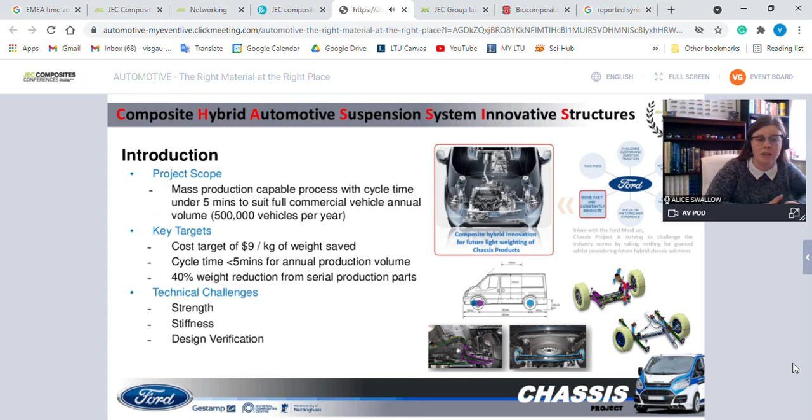There's obviously a lot of technical challenges with this. As I mentioned, they're all structural components looking at the suspension. So it's really important to look at the strength and stiffness and design verification. A lot of these parts, the strength and stiffness will actually determine the vehicle dynamics, so obviously we don't want to change our vehicle dynamics DNA that our customers are used to.

The three suspension structural components that we're looking at are the front subframe on the left, the front lower control arm in the middle, and the rear dead beam at the end, which is just the rear non-driven axle. We have the steel components on the top and our hybrid designs at the bottom, which I'll go into more detail in later slides.

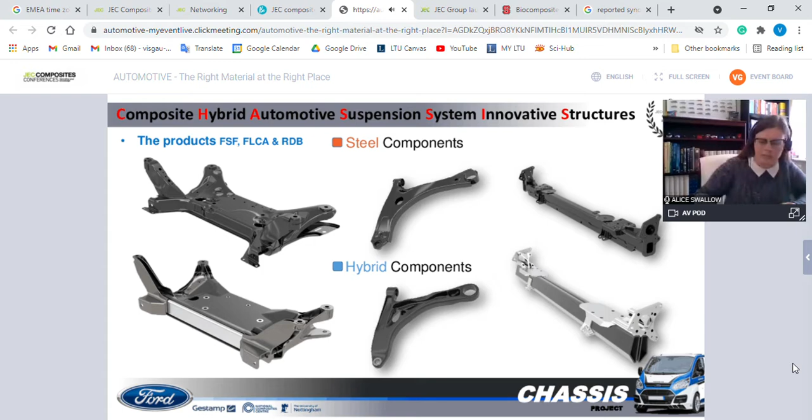Another great aspect of using the right material in the right place, using composite materials and adhesives in the design, is that we can actually reduce the part count within these components. This is a great way to ensure that it can be easily integrated and assembled. Obviously, that reduces a lot of complexity, reduces a lot of opportunity for error, and therefore improves quality. Across the three components that we looked at, we actually had a 56% reduction in parts, so that was another benefit of the project there.

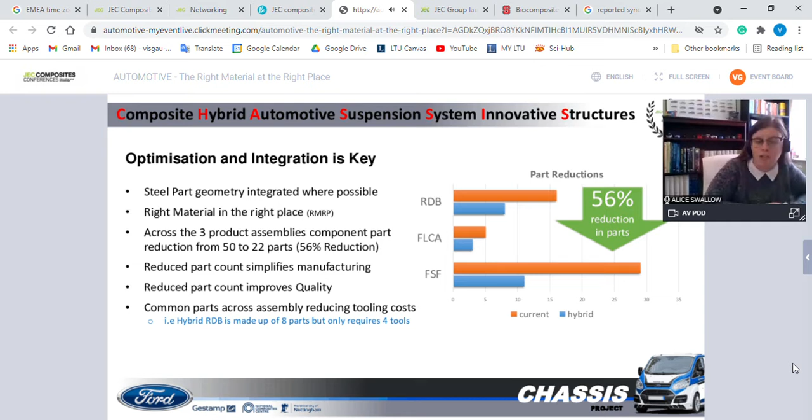Looking specifically at the front subframe, there's an estimated 38% weight reduction for this part. We're using the right materials in the right place here, using different materials including aluminium as well as composite materials.

The side rails on the left hand side of that image will be produced out of a high pressure die cast aluminium material. However, for the prototypes we're currently assembling, we're actually machining these out of solid billet. The billets are currently 132 kilos, and once machining is complete, these side rails are 2.82 kilograms.

So a lot of swarf created in that process. Don't worry, we're recycling them and keen on sustainability. But just to show you the complexity and the amount of pockets that have been created on that design by Gestamp.

To ensure that we can have the ultimate weight saving and lightweighting on these parts, we also use carbon SMC. On that front rib section there, you can see the carbon SMC. We also have carbon prepreg upper and lower panels, and an aluminium extrusion bar on that front edge there as well. We also have the steel steering bobbins and transmission bobbins taken from the predecessor part.

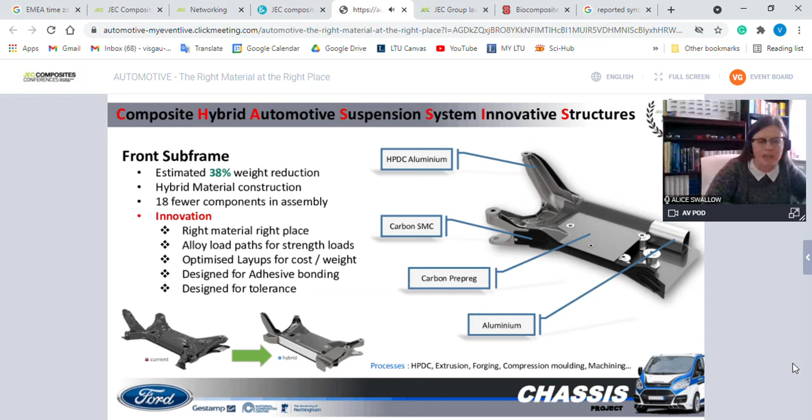Looking a little bit at the CAE analysis for the front subframe. As I mentioned previously, a lot of these parts are driven by their stiffness or strength targets, certainly to ensure that the vehicle dynamics is similar to the predecessor vehicle, to ensure that ride and handling is similar for our customers. So it was really crucial that we had comparable stiffness targets, which was done by our partner Gestamp on the project.

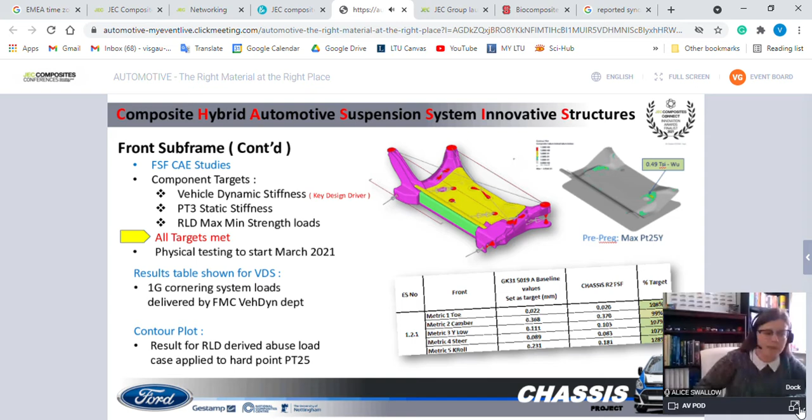Our next part, the front lower control arm, estimated around 29% weight reduction. This uses also the hybrid material and right material in the right place, with a steel puck for integration into the wheel and into the body, as well as our original bushes for ease of assembly. We're looking at a PA12 long glass fiber core using overmolding technology, and a PA12 long carbon fiber shell, also overmolding over the core.

Again, this was looking at the load paths and the connection to the system by using the steel puck, and then the hybrid of materials for the rest of the part. This was designed predominantly with overmolding in mind to ensure that we could achieve a quick cycle time. There's also a patent pending on this design for Gestamp, who designed this part.

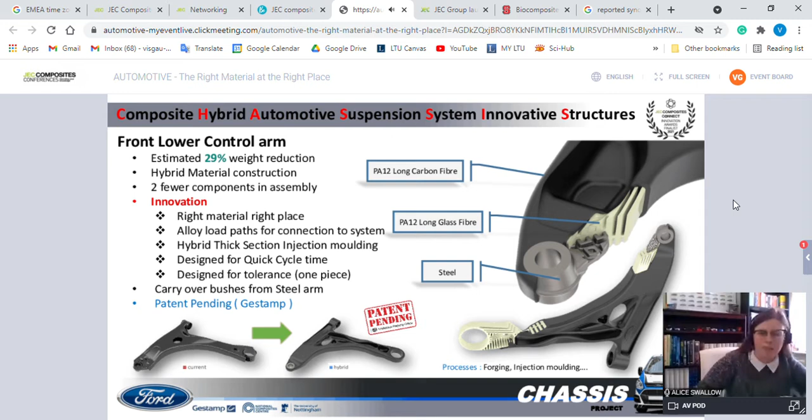So it's really important that these parts meet these strength and buckling requirements, with an x-axis buckling load of over 42 kilonewtons and y-axis over 50 kilonewtons. There's obviously a lot of forces and load paths going through these parts, so it's really crucial that we meet those. All targets have been met through CAE, and we're currently in the stage of making these prototype parts ready for physical testing.

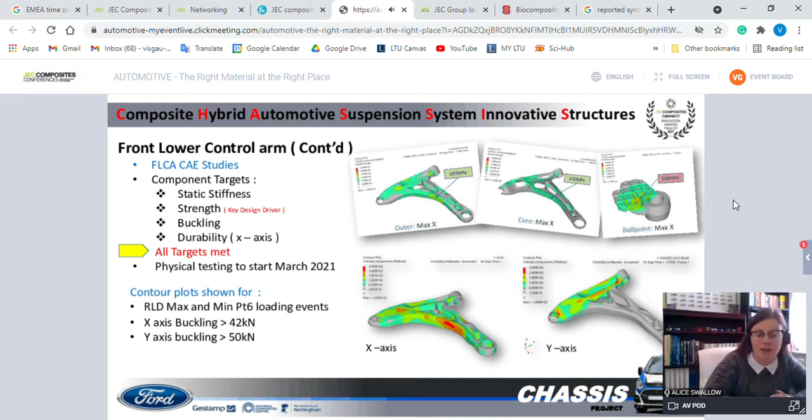And the last component, the rear dead beam. This is using a process called pultrusion, a continuous process, which is great for hitting our mass production targets. We can get a cycle time well below 5 minutes, and it also reduces the number of components in the assembly by 8 components per assembly.

We have aluminium extruded parts for the jounce bumper plates and for the hub mount attachments, attaching those to the wheel. They're 2 separate parts, and we also have some dampener bracket attachments. Other than that, we just have the rear dead beam, 2 pultruded composite beams made of hybrid materials also. We're looking at a unidirectional glass tow as the main material of the beam, with a triax carbon material as the inner core for the structure, and woven carbon and tapes on the outside of the beam.

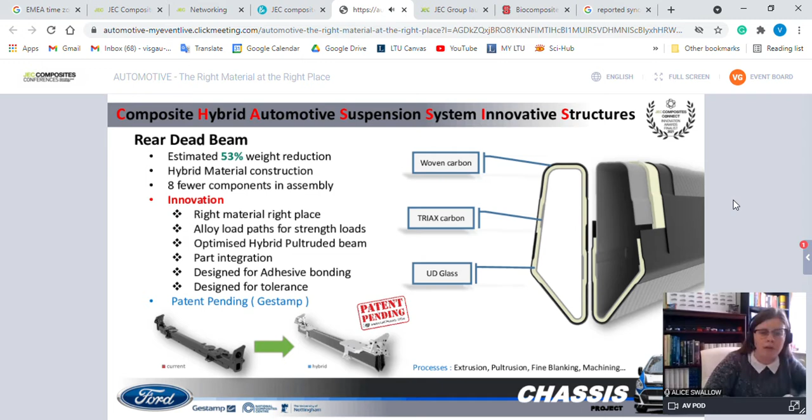So again, the CAE analysis for the rear dead beam, as it's an identical part, is mirrored from left to right, so you only need to analyze the right side of the part. Again, this is a very structural component, so it's driven by stiffness, strength, and durability.

Looking at strength and our road load data, with our max load being 56 kilonewtons as our key design target. With the CAE analysis, all targets have been met. Physical testing of some of the subcomponents has already been conducted, which has correlated well with the CAE analysis, with plans for the components being currently assembled, with full assembly rig testing in the next few months, and then full vehicle testing after that.

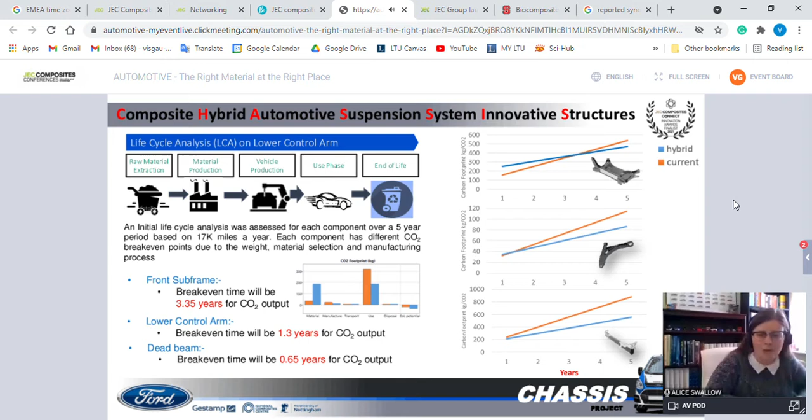Similarly, for the front lower control arm, only 1.3 years for break even for CO2, and less than a year for the dead beam, so 0.65 years, we actually get a break even for the CO2 output. So obviously over time, this will be reducing CO2 and looking at sort of carbon negative for those parts.

So overall, looking at the weight saving for all three components, we had a weight reduction of 44%, so over the 40% weight reduction that had been planned. Our project target was around 25 kilos, and we've saved 30.6 kilos by using a hybrid material in the right place approach.

And some conclusions for where we are currently in the project. We have achieved our sub 5-minute cycle time by utilising processes such as compression moulding, pultrusion and overmoulding. A lot of these processes has allowed us to ensure that we meet that cycle time requirement for mass production, which can ensure that the full annual volume of vehicles are achievable off a single tool.

We've achieved a 44% weight reduction, so over the 40% compared to the original scope of the design, as well as the additional benefit of 56% reduction in the number of parts within assemblies to reduce complexity and improve quality of our design. There's been lots of innovative CAE optimization and topology that's been developed by our partner Gestamp.

We've also had manufacturing simulations which can predict test conditions. We found that with the start of our physical testing of some of the subcomponents, this has correlated really well to the CAE targets and CAE analysis that's already been conducted. All components that have been designed have met those CAE targets, and because of the correlation, we're really confident that those components will meet the physical testing.

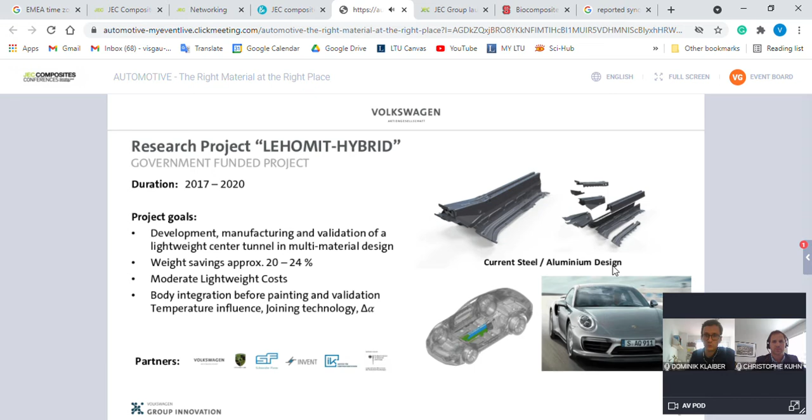Here's an overview of what we have done in the project, and the ends of the project. This is also the agenda for today. We started with the existing design of the Porsche Boxer, as mentioned, in aluminum and steel components.

Then we developed different materials as a new concept. We implemented this technology and created a new manufacturing process for mass production of these hybrid prototypes. We inserted this center tunnel into different components at Porsche, above all in the development center in Weissach, but also in the production line in Zuffenhausen. We did different tests regarding the cathodic dip painting and different crash analysis, and then there's the last step of transferring this know-how into new concepts for serial production.

You can see here the existing body structure of the Porsche Boxer and the center tunnel, assembled and disassembled, so you can already see that there are plenty of different single parts which normally have to be joined. In our concept, we just have one part, and therefore we need two tools, which I will show you on the next slide.

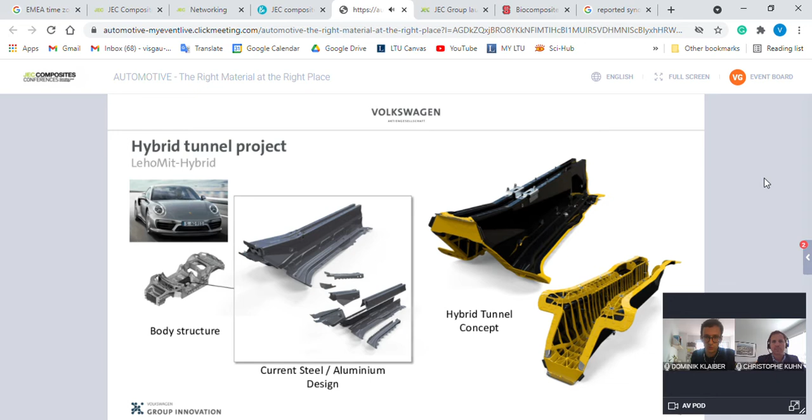So we have rib injection and forming of the carbon fibers. Maybe I'll just disconnect my video because it says the connection is low. So, okay, hope it works well. So the center consists of the glass fiber reinforced injection molding rib structure.

But then we have the main part, the carbon, glass and carbon fibers, the hot stamp steel insert for connection to the front of the vehicle or front of the body in white, the thread inserts for connecting all the different pipes, and load transfer elements for connecting further elements.

On the left side, you can see that we are not using just a single big UD tape, but several layers with a special layup in different fiber directions, which form the main part for overall stiffness. Then in brown, which you can see in the middle, there are further layers, above all for the load transfer for front crash, and further 90 degree switched layers also for the front crash, because there we have different load paths. In order to keep the element together, we needed further pins here.

So this is how we could evaluate and be able to integrate such a complicated part with complicated load cases in one part. So Chris, now I hand over to you. Maybe you can show us how we've been able to manufacture such a part.

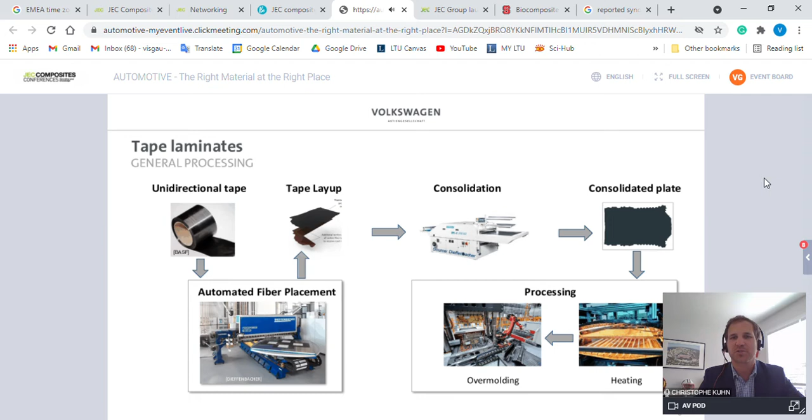Of course, due to timing, we weren't able to show our production process. We actually have a cool video, but this would totally go against the time constraints here. Hopefully we can upload that to YouTube or something similar soon, so you can see how we do this. So we have to go a little bit more simple, and we can show you here from the manufacturing side.

We use two locations. The first was in Neckarsulm in Germany with our colleagues from Audi, who have basically almost a similar injection molding machine with a vertical press opening, as we do in Wolfsburg. Here in Wolfsburg, we have the Open Hybrid Lab Factory, which is like a research campus, and you can see we have an angle injection molding machine that's able to open the mold in a horizontal way, so we can bring in inserts and these tapes more easily than it would be in a vertical way.

If we look into the next slide, you can see a little bit more detailed the setup, and I'll try to explain it as good as I can.

One of the things we have to do is take the different layers of the UD tape layup, the consolidated plate, and heat it up. It's thermoplastic, so we need to eventually drape it into this nice shape of the tunnel. We use an infrared oven to place the consolidated plate in, close the oven, and heat it up with infrared radiation. Once that's done, we have a handling robot with a needle gripper system that's able to transport the layup safely from the oven inside the mold.

You can actually see once you drop it, it almost looks like people always mention it looks like a wet cloth that you just drop over it. Then during the actual processing, we close the mold, which means we compression mold and drape that layup. Once the mold is closed, we injection mold the plastic. We add all the metal components before with an additional robot, or sometimes just by hand, and this is basically how we bring these three types of materials together.

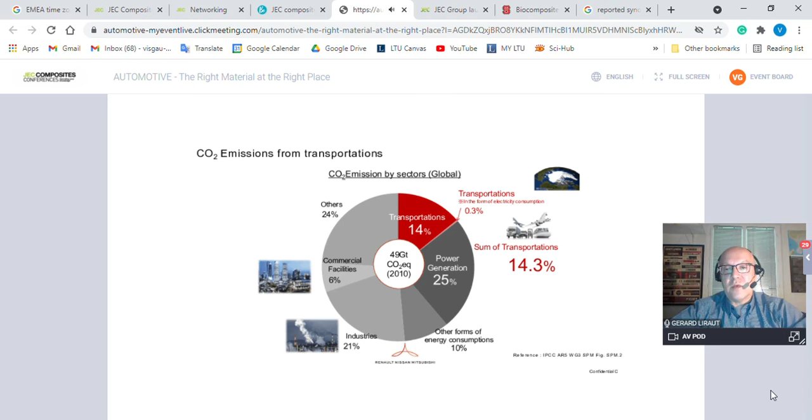We have not to forget the final goal, which is to reduce carbon dioxide emissions. As you may know, transportation is responsible for about 14% of carbon dioxide emissions worldwide. So transportation is part of the problem, and therefore it has to be part of the solution.

For that, we have different activities to reduce carbon dioxide emissions. It could be to reduce the aerodynamic behavior, to reduce road resistance, to design more efficient powertrains, or to use more electrical solutions, and of course, last but not least, to reduce the weight of the materials used in our cars.

We have to reduce the weight for many different reasons. The first one is, of course, the more material you use, the more carbon dioxide you emit during production of the materials and of the cars. The more material you use, the more energy you use, so the more carbon dioxide emission you have.

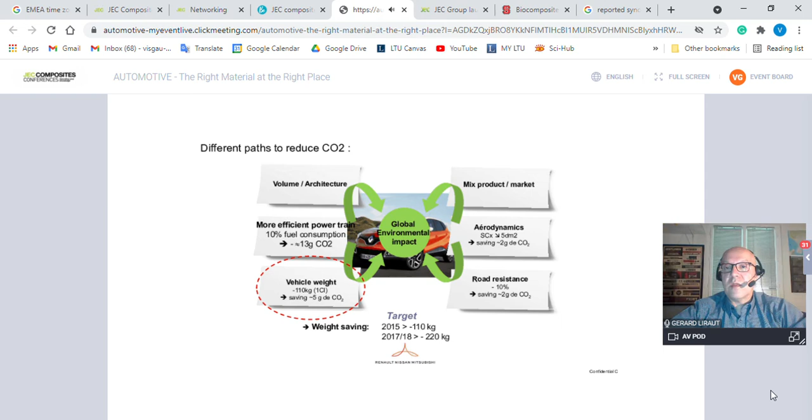And at the end of the day, if your car is too heavy, the drivability of the car is not so nice. So we have in mind lots of different composite materials and applications in many different cars. It could be in the bumpers, the tailgates, the hood, the chassis, the floor, spare wheel trays, or trays inside the pickup.

Often when we think about using composite material, we immediately think we have to use this kind of material in order to reduce the weight of the car. Weight is important, and tomorrow the car will use more and more lighter components, even in some mechanical applications. We have seen that, for example, with the presentation from Ford previously.

And we have to use this lighter solution in order to compensate for the new added functionalities induced by electrification, induced by new gasoline engines, induced by connected cars or autonomous driving.

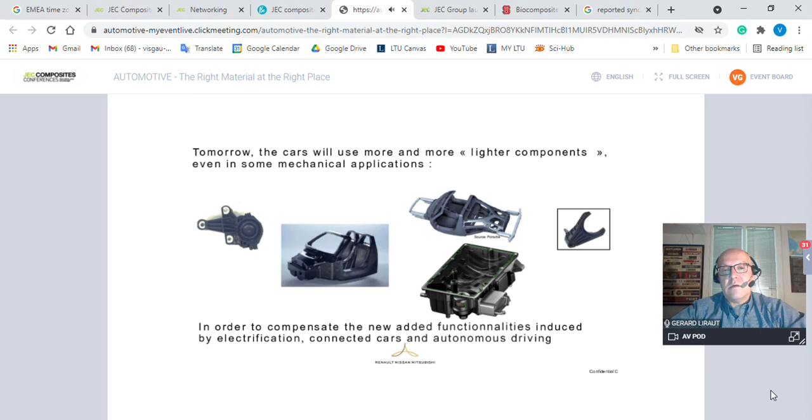So if you follow me, you may think that we can use composite material only for lightweighting. Composite materials are very important for lightweighting, but sometimes composite materials are the right solution even for cost. We all know that for small volumes, composite solutions could be cheaper than steel solutions.

However, with this same example, if we use carbon fiber SMC, the volume of cars up to which it is cheaper to use composite material is smaller than with SMC using glass fiber. In this case, it's only maybe 40,000 cars.

So that's why we have to keep working in order to reduce the cost, mostly the cost of the carbon fiber reinforced polymers.

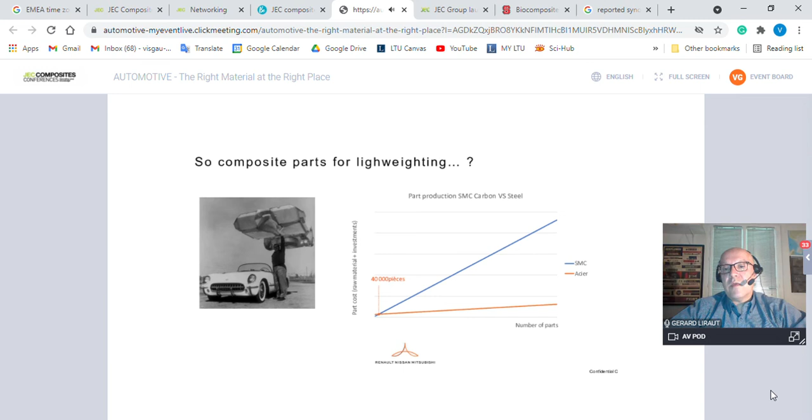For example, we have used this kind of technology for the Megane Trophy. Composite material was not used only for lightweighting of the hood, but also for style and for cost. For this mold production, it was not cheap, but it was cheaper to use composite material instead of aluminum or steel.

However, as I said, we have to reduce the cost of the raw material. That's why Renault is working and involved in a French program called FORCE. The aim of this project is to produce cheaper carbon fiber using cellulose as a precursor instead of PAN. We want to achieve 8 euros per kilo for the carbon fiber in order to implement this kind of technology in large volumes.

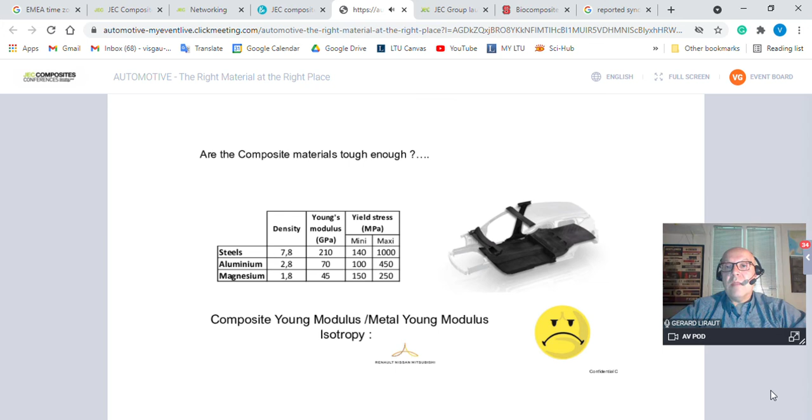If you are an engineer, sometimes you design the part only for stiffness. But composite material for stiffness is maybe not the good solution, because due to the non-isotropy of material, concerning the value of the young modulus, it's often difficult for the composite solution to compete with metal like steel or even aluminum. So you have to increase the thickness, put some ribs, find some design in order to compensate and have a part which is as rigid as the metallic solution. But sometimes it's not possible, mostly in some parts of the body in white.

You may also design the part for mechanical resistance. In this case, composite material may seem to be the right material for the right application. Because for hydrogen tanks, for example, or high pressure tanks, or even beams for the front part of the car, the mechanical resistance of the composite material leads to a solution which is lighter than the metallic solution like steel or aluminum.

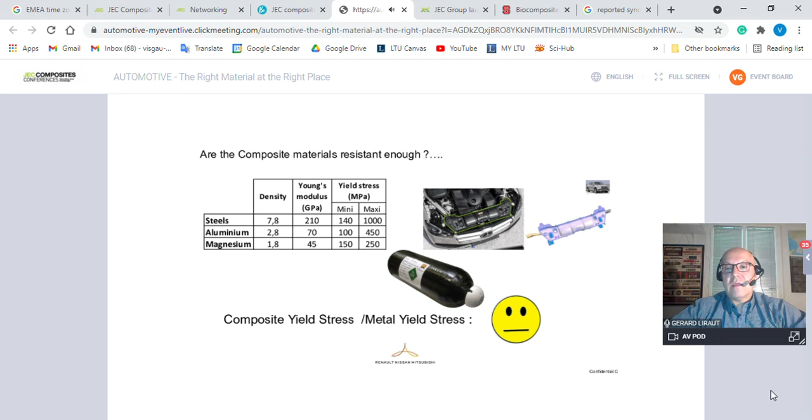Same philosophy for crash absorption. Composite materials are the correct material for crash behavior, and the energy absorption of composite material is much better than metal, steel, or even aluminum. So that's why we are planning to use this kind of solution for the crash boxes of our cars, lateral ones or front ones.

And concerning fatigue, let's say that the mechanical properties of fatigue of the composite material are very good compared to the steel and aluminum properties. So that's why we have validated some application for using composite springs for our cars. And we are thinking about implementing this kind of application in the future, because the balance between composite and metal is quite in the advantage of composite material.

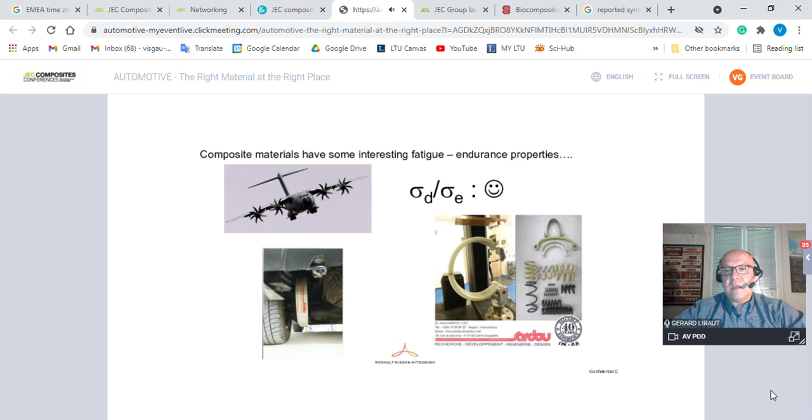Sometimes when we do speak about composites, the first question we have is, do you have a process which is able to produce a high volume, high number of parts per day? I would say that the answer is quite obvious right now. If you do speak about SMC non-aesthetic application, we have implemented this kind of technology in our cars. We use some SMC materials in our spare wheel trays, and we can produce, let's say, 2 parts per minute with our facilities and the facilities of our suppliers.

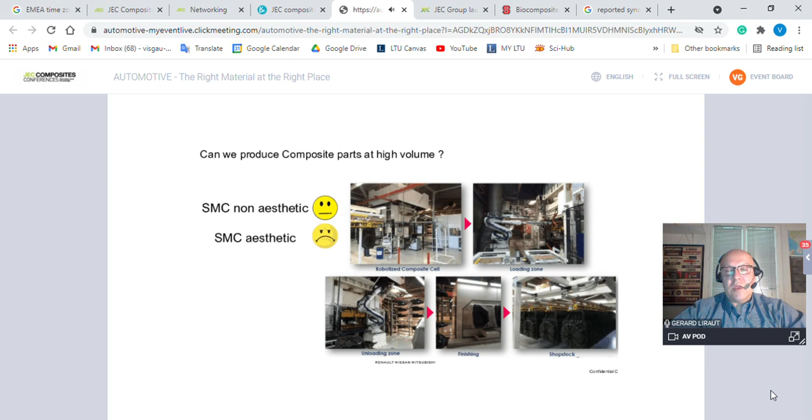However, if we do speak about Class A surfaces, RTM or SMC composite, right now we are not able to produce this kind of technology or this kind of part at a high volume, because at the end of the process we have to polish a lot, which makes the part more expensive and drastically increases the cycle time.

So in order also to investigate if we can use some composite material like thermoplastic organosheet, we were involved in a project with some French technical institute in order to make some platform with which we are able to produce some parts. In this case, we are speaking about thermoplastic organosheet, which is stamped, and the cycle time is less than 1 minute. And the size of the part is a little bit less than 1 square meter. So we can say that right now we have the technology in order to implement with a high volume, high capacity, this kind of technology for, let's say, the floors, for example.

We did the same with the CRTM technology. We have created 2 platforms, Fast RTM and Fast Form, in order to produce some preforms and to use the RTM process at a high volume. And we were able at the end of the project to produce 1 part with a cycle time of less than 2 minutes. So right now we can say that we are confident in the SMC technology, in the thermostamping technology, and in the CRTM technology, and we are confident that we can use them right now in our cars.